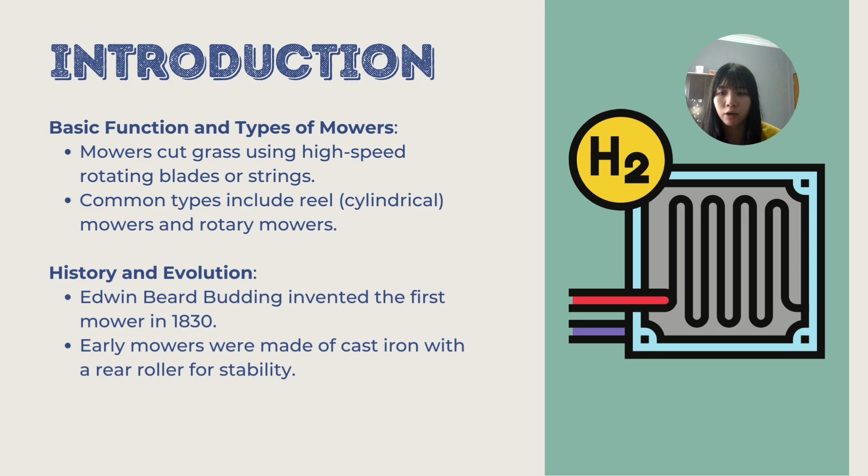The invention of the lawnmower dates back to 1830 thanks to Edwin Beard Budding. He designed the first mower after being inspired by a machine used to smooth cloth in textile mills. Early mowers were made of cast iron and featured a rear roller for stability, reflecting the ingenuity of early industrial design. There are six types of modern variants for mowers.

Firstly, reel mowers provide a crisp cut with their scissor action, making them environmentally friendly, quiet, and requiring minimal maintenance. They are an excellent choice for small to medium-sized lawns. Rotary mowers, powered by either electric motor or internal combustion engines, release cut grass through an opening. While robust and efficient for larger areas, they are not as eco-friendly as reel mowers.

Next, electric mowers are available in both corded and battery-operated models. They are quieter, emission-free, and cleaner compared to gas-powered mowers. They offer a modern solution for environmentally conscious homeowners.

Next, gas power mowers are highly effective for cutting thick grass and managing large properties. However, they require more maintenance and are less environmentally friendly due to the emission.

The riding models are designed for extensive lawns. It significantly reduces mowing time and physical effort. They come in various types including land tractors, zero-turn mowers and rear-engine riding mowers, each suited for different purposes.

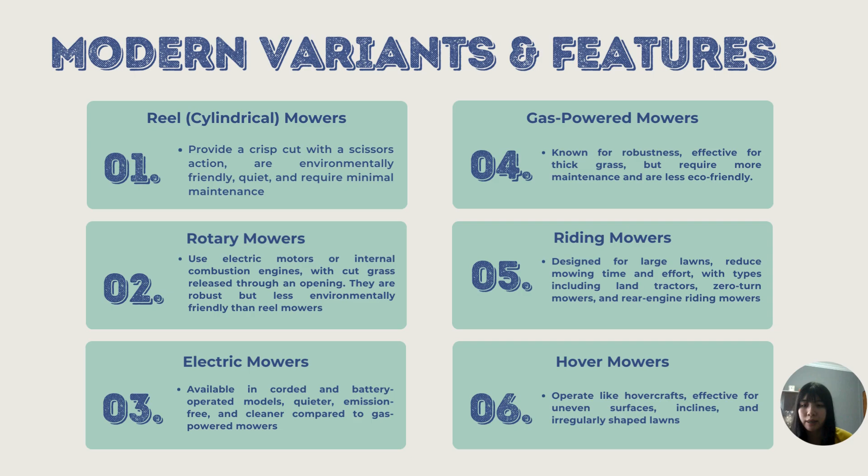Lastly, hover mowers operate on a principle similar to hovercraft. They float above the ground, making them particularly effective for managing uneven surfaces, inclines, and irregularly shaped lawns.

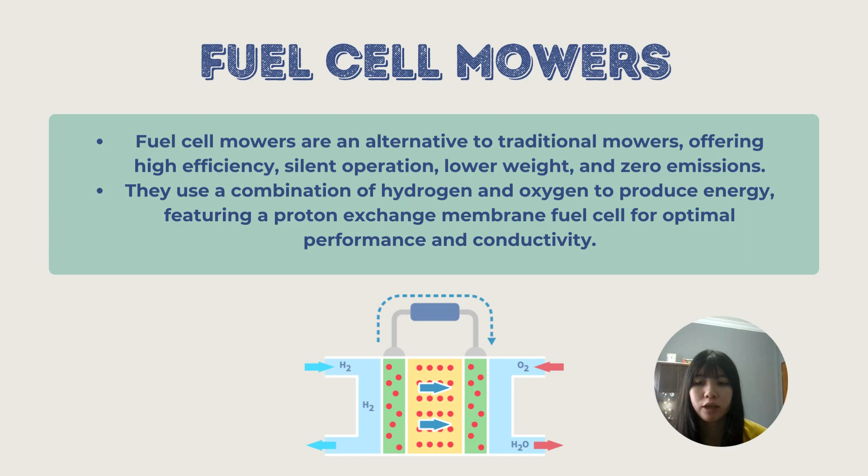Now let's talk about the future mowing technology, which is the fuel cell mowers. These innovative machines are an excellent alternative to traditional mowers, offering high efficiency, silent operation, lower weight, and zero emission. Fuel cell mowers use a combination of hydrogen and oxygen to produce energy, employing a proton exchange membrane fuel cell for optimal performance and conductivity.

Next, the mower design will be discussed. The first part is the blade system of the mowers. There are five types of blade commonly used in the mowers.

The high lift blade is suitable for cutting tall and flimsy grass due to its high suction level, which ensures no grass accumulates in the chute, thus preventing damage. However, this blade type requires high power to generate the necessary suction.

The low lift blade is ideal for cutting short grass and performs well in sandy soil conditions. It has low suction level, which means it requires less power to operate.

Next, the gator blade is best used for overgrown grass. It has a high suction level and its unique gator teeth design continuously push the grass towards the sharp cutting edge as the mowers move. While this blade is excellent for fertilizing soil, it is not suitable for use in sandy soil conditions.

The mulching blade is designed for cutting grass into fine pieces, which can then be returned to the soil as natural nutrients. This blade, also known as three-in-one blade, features curvier edges suitable for this purpose. However, it is not ideal for cutting dense grass as it can potentially damage the mower deck.

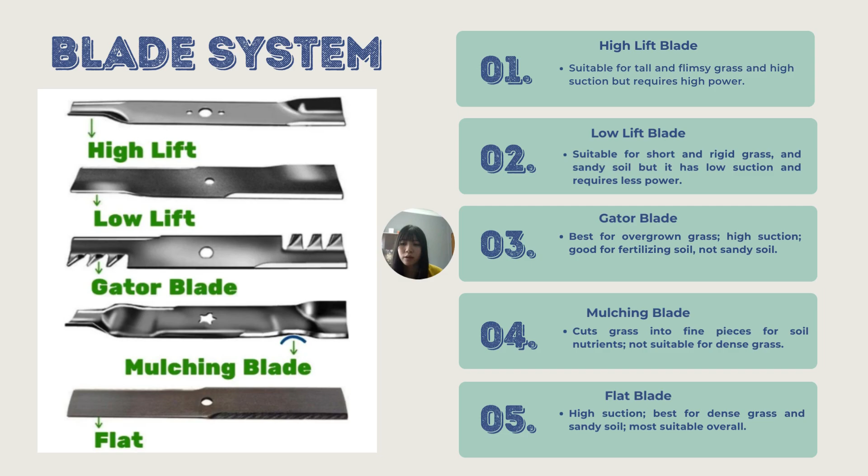The flat blade has a high suction level, making it well suited for cutting dense grass and operating effectively in sandy soil conditions. This blade system is considered the most suitable overall due to its versatility and efficiency in various conditions.

The fuel cell technology represents a significant advancement in powering lawn mowers. It converts hydrogen or methanol directly into electricity, providing a clean energy solution with water as the only byproduct.

There are several types of fuel cells, including alkaline fuel cells, phosphoric acid fuel cells, molten carbonate fuel cells, solid oxide fuel cells, polymer electrolyte membrane fuel cells, and direct methanol fuel cells. For this project, the polymer electrolyte membrane fuel cell was chosen due to its high power density, scalability, rapid startup, and numerous environmental benefits.

Modern lawn mowers often feature a self-propel system, which significantly reduces physical effort by using a motor to drive the wheels. This system is especially beneficial for large lawns or those with uneven or inclined surfaces, providing enhanced convenience and reducing user fatigue during extended mowing sessions.

A sophisticated height adjustment system is essential for optimal lawn care. This system allows users to easily adjust the mower deck's height using a pedal or lever, enabling them to choose the preferred cutting height. This functionality ensures a customized mowing experience suited to different grass types and lawn conditions.

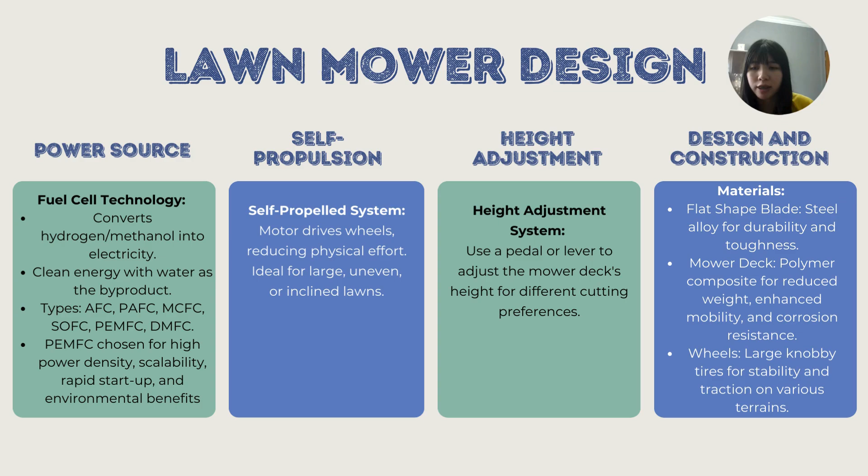Large knobby tires are used for the wheels to enhance the mower's stability across various terrains, including wet grass and uneven surfaces. These tires feature deep treads with visible lugs or knobs, which provide superior grip and traction, preventing slipping and sliding, and ensuring efficient and safe movement across the surfaces.

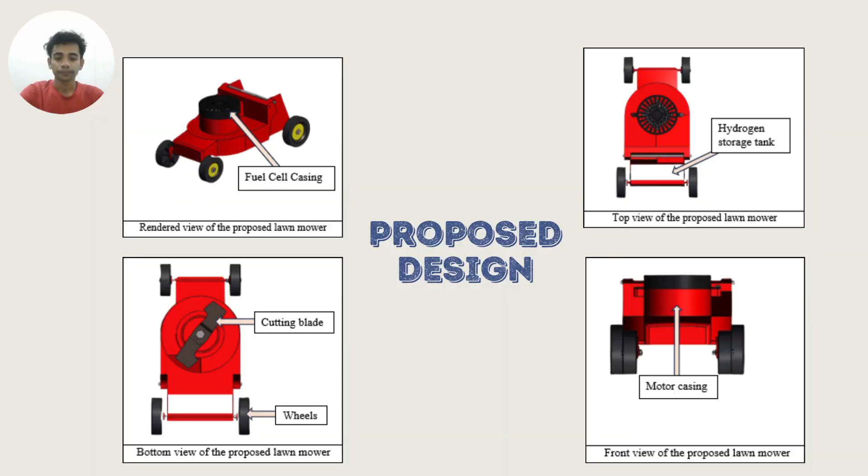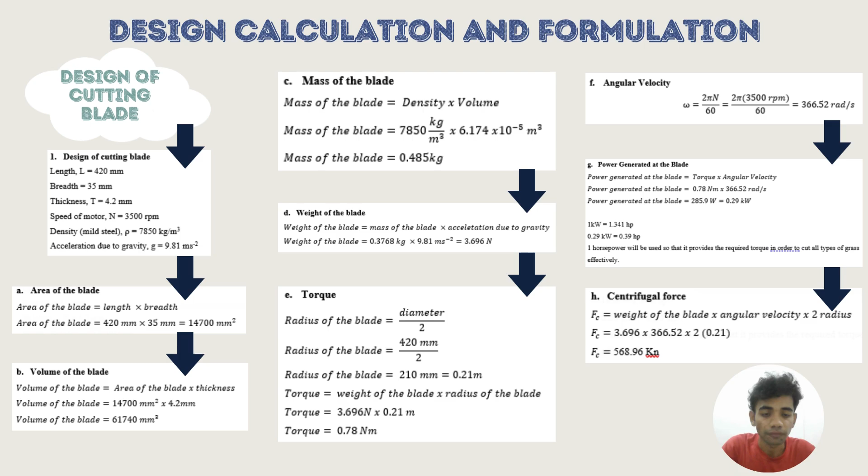For the calculation, we have the yield stress, ultimate stress, allowable shear stress, bending moment, and lastly sectional modulus Z.

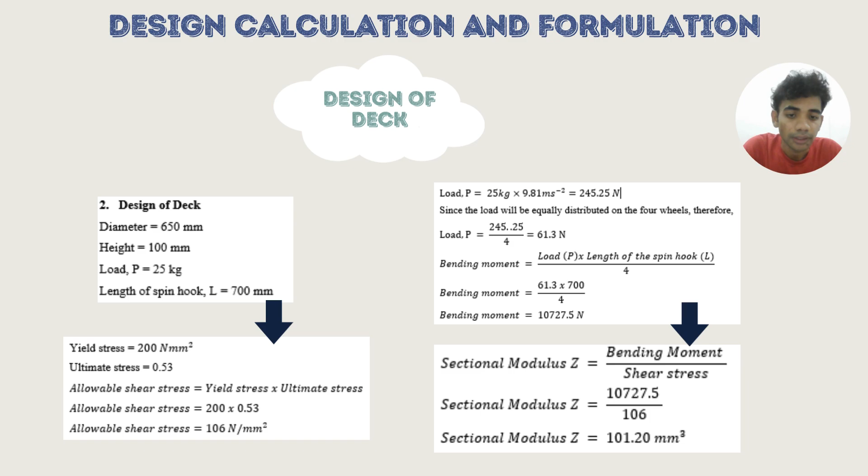Next, I will present the fuel type properties, which consist of five properties: high calorific value, high efficiency, minimal environmental impact, attainable ignition temperature, and low maintenance cost.

High calorific value refers to the amount of energy produced by the complete combustion of a unit of fuel, used to determine the efficiency of a fuel. High efficiency refers to the direct conversion of chemical energy to electrical energy, not limited by Carnot cycle constraints. Minimal environmental impact relates to lower emission of CO2 and NOx per kilowatt, better efficiency, lower fuel oxidation temperature, and minimal noise and vibration due to fewer moving parts.

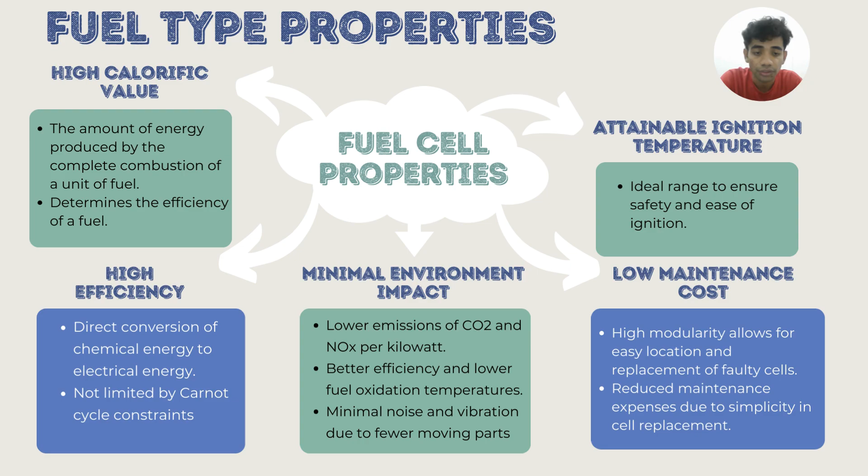Attainable ignition temperature refers to the ideal range to ensure safety and ease of ignition. Lastly, low maintenance cost ensures high modularity, allowing for easy location and replacement of faulty cells and reducing maintenance expenses due to the simplicity in cell replacement.

Next, the primary components consist of three: the electrolyte, electrode, and catalyst. For the electrolyte, this refers to the membrane restricting ion flow and transmitting protons in the PEM fuel cell. For the electrode, there are two electrodes, which are the anode and cathode.

Anode refers to the negative pole where the hydrogen splits into the electron and proton, while the cathode is the positive pole where the oxygen combines with the proton and electron to produce water. Last but not least, the catalyst, which is coated on both anode and cathode, typically made of platinum, is used to speed up the chemical reaction.

For evaluating performance, there are two aspects for the electrolyte and three for the electrode. For the electrolyte, there is proton conductivity, which refers to high conductivity, lower internal resistance, and increased efficiency. For durability, it must withstand temperature, humidity, chemical stability, and mechanical stress without degrading.

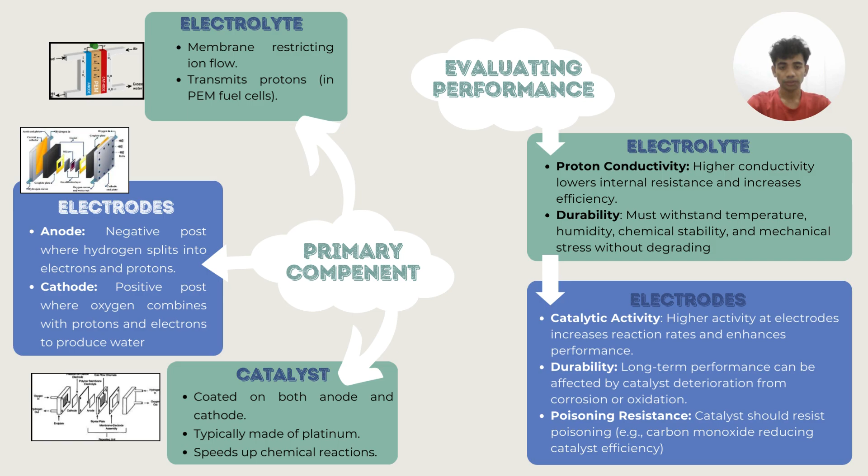For the electrode, catalytic activity shows high activity at the electrode, increasing the reaction rate and enhancing performance. For durability, long-term performance can be affected by catalyst deterioration from corrosion or oxidation. And lastly, the poisoning resistance - the catalyst shows resistance to poisons, for example carbon monoxide reducing the catalyst efficiency.

The heat management system involved in this mower is the thermal management system, which is essential to maintain the thermal equilibrium in this fuel cell. Therefore, in this project, we are using a hybrid nature of system dynamics facilitated by a two position, three-way valve that can manage the power distribution between the fuel cell stack and the energy storage unit.

The essential reason for having this efficient heat management is firstly because the electric energy produced from the interaction between the hydrogen and oxygen through the electrochemical process can produce heat and also water as a byproduct of that process.

The electric pump also regulates the coolant entering the stack. This factor can also contribute heat transfer to or from the stack, which can contribute to heat that causes overheating in the fuel cell.

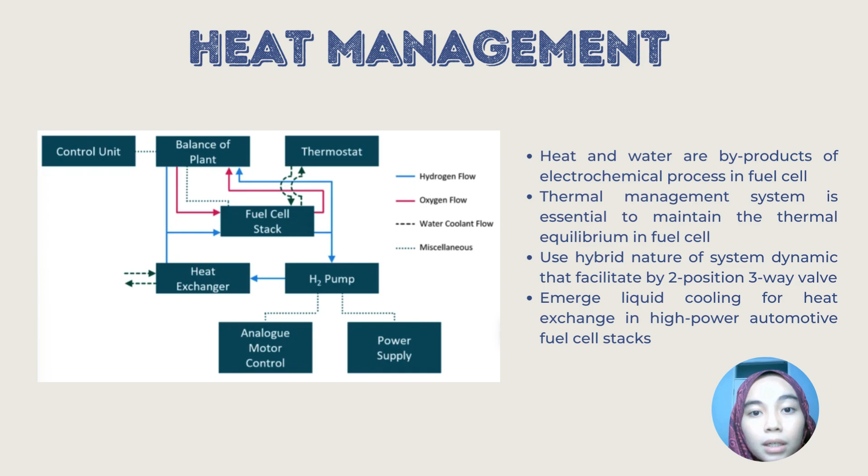Additionally, another application to prevent overheating is by employing liquid cooling for the heat exchanger in the high power automotive fuel cell stack. The heat management is important not only to prevent overheating but also to prevent any possible faults such as dryness and degradation of the electrolyte membrane due to evaporation that may cause gas phase water within the membrane.

Next, for water management, it's important to maintain the optimal water content within the membrane for efficient fuel cell operation, to avoid the membrane from dehydration.

In this project, we're using the electro-osmotic drag to pull the water from the anode to the cathode. This is because the water that accumulates at the cathode catalyst layer can cause obstruction of the gaseous oxidant's access to the reaction surface, which can limit the stack's performance.

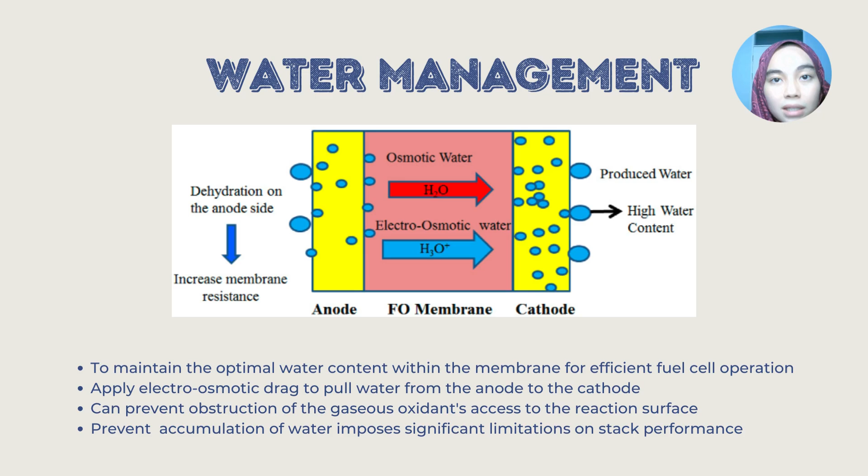The technical and economic aspects, in terms of economic control mechanisms and also safety, are involved in this project.

Firstly is the economic aspect. Even though hydrogen is expensive compared to conventional gasoline, hydrogen has higher efficiency and lower emissions. Hydrogen is still better than conventional gasoline because hydrogen can store more energy and also needs lower maintenance due to fewer moving components and experiences less wear and tear.

The fuel cell mower undergoes an electrochemical process as discussed in the previous slide. The electrochemical process turns hydrogen into electricity, which drives the mower blades, compared to a combustion engine.

Next, for the control mechanism. This control mechanism is essential for this mower because it can operate at high performance of the PEM fuel cell. The sensor track that we are using for temperature management is to avoid thermal stress and also eliminate heat produced during operation, as discussed in the heat management part.

The sensor track is used to send information to automated control systems so they can modify heat dissipation and cooling power mechanisms as necessary. This can extend the fuel cell life through power management that uses a mass flow controller and valve.

Lastly, for safety, in order to store hydrogen safely, safety valves are incorporated into the hydrogen tank and construction to guard against leaks and rupture and to resist heat and pressure. This system monitoring can be turned off if danger is recognized by sophisticated sensors and the control system.

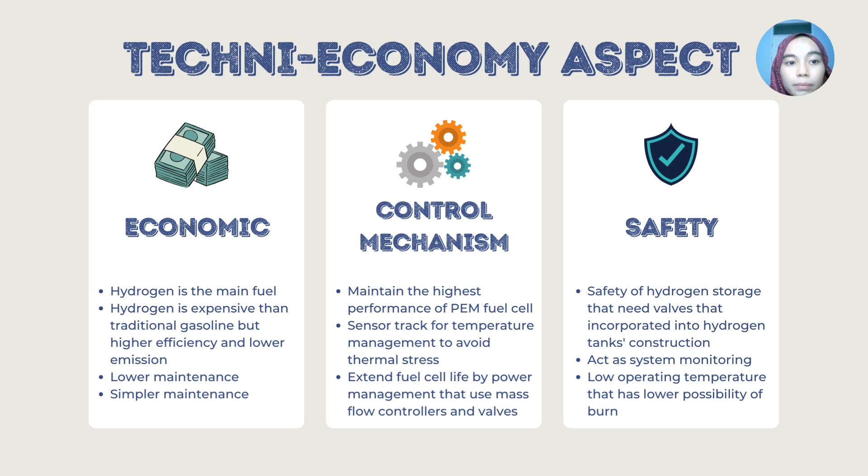The use of fuel cells only operates at a low temperature, hence lower possibility of burns that could occur. This makes the fuel cell safer compared to gasoline combustion.

The safety aspects that need to be considered include storage of hydrogen. It is essential to store hydrogen safely. Safety valves are incorporated into hydrogen tanks' construction to guard against leaks and ruptures and to resist high pressures.

Next, system monitoring. This is essential to identify any irregularities early on. The fuel cell system must be continuously monitored, and the system can be turned off if dangerous situations are recognized by sophisticated sensors and control systems.

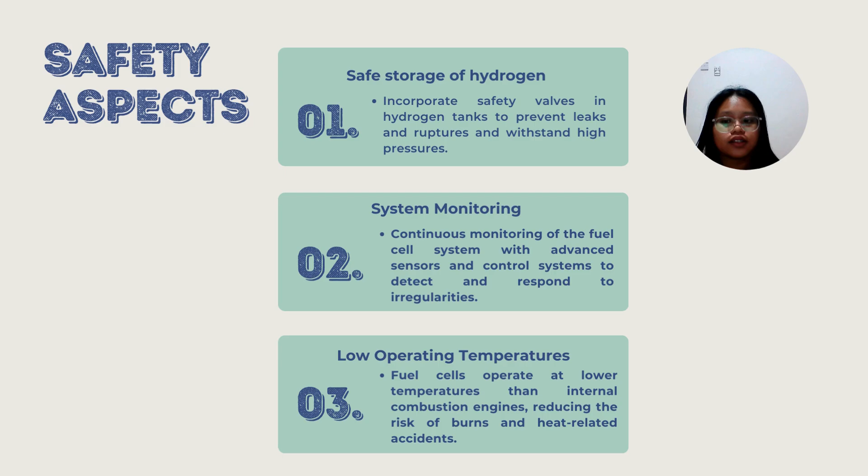Lastly, low operating temperatures. Compared to internal combustion engines, fuel cells typically operate at lower temperatures, which lowers the possibility of burns and heat-related mishaps during upkeep and operations.

The performance evaluation of mower design focuses on key functional elements to ensure high standards and user satisfaction. Cutting efficiency is crucial, which refers to the mower's ability to cut grass cleanly and evenly.

The shape of blades, which are sharper and higher quality, provide a precise cut which directly minimizes missed spots and reduces the need for multiple passes. Therefore, the grass cut results in a great looking lawn and enhances the health of grass growth.

Power and fuel efficiency are also important, involving the mower's power output and its fuel or battery usage. Efficient power ensures the mower can handle thick grass without bogging down, while fuel efficiency lowers operating costs and environmental impact. Our engines are optimized for fuel consumption and emissions, while electric models offer quiet, eco-friendly performance with long-lasting battery life.

Next, maneuverability and ease of use encompasses how easily the mower can be moved and controlled, especially around obstacles, and the overall user friendliness.

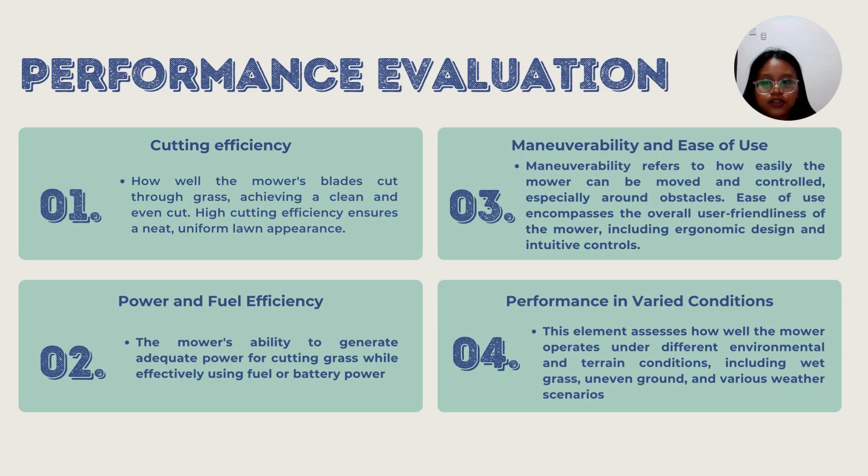Additionally, the mowers perform admirably in diverse weather conditions, cutting through wet grass without clogging and operating reliably in extreme temperatures. This versatility ensures that the mower delivers exceptional performance, efficiency, and user satisfaction, making lawn care more efficient.

Now, let's dive into the key elements that ensure our mowers operate at peak efficiency while preserving longevity and reliability. Firstly, our mower incorporates a PEM fuel cell power source, renowned for its efficiency in converting 60% of hydrogen's chemical energy into usable power.

To maintain optimal performance, we implement rigorous heat management, crucial for keeping operational temperatures between 60 and 80 degrees Celsius. This prevents membrane degradation and ensures consistent efficiency.

Secondly, effective water management is pivotal. Maintaining humidity levels above 80% promotes efficient proton transport, essential for the fuel cell's operation. However, balancing water levels is critical to prevent flooding and channel blockage that could impair performance.

Our system also features a robust control system to enhance safety and performance, safeguarding critical components and ensuring reliable operation under various conditions. To maximize efficiency, proper handling and maintenance protocols are essential, including meticulous storage in a clean, dry environment to prevent corrosion and maintain component integrity.

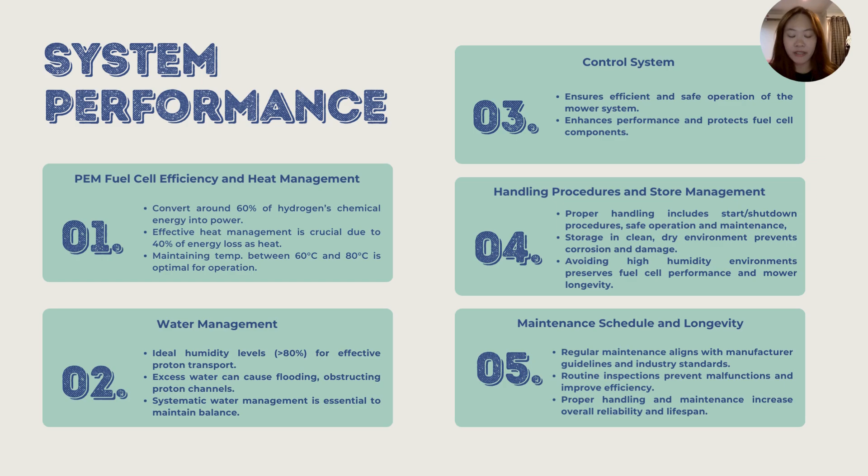Lastly, adhering to a structured maintenance schedule aligned with industry standards is crucial. Routine inspections of the fuel cell, control system, and water management components help identify and address potential issues proactively, enhancing overall performance and reliability.

Traditional gasoline-powered mowers emit harmful pollutants such as CO, NOx, HC, and particulate matter, significantly impacting air quality and health. In contrast, fuel cell mowers produce only water vapor and heat, offering a cleaner alternative that improves air quality and reduces health risks associated with poor air conditions.

Looking ahead, technological advancements including AI and machine learning are enhancing efficiency and automation. Fuel cell systems, especially PEM technology, show promise for their efficiency and zero emission characteristics with pure hydrogen fuel. Despite current cost challenges, ongoing research suggests cost reductions, making fuel cell mowers increasingly viable.

Regulatory trends, such as California's ban on gasoline-powered lawn equipment from 2024, are driving demand towards electric and battery-powered alternatives, further supporting the growth of sustainable mower solutions. Consumer preference for eco-friendly options are also fueling market expansion, particularly in robotic mower segments.